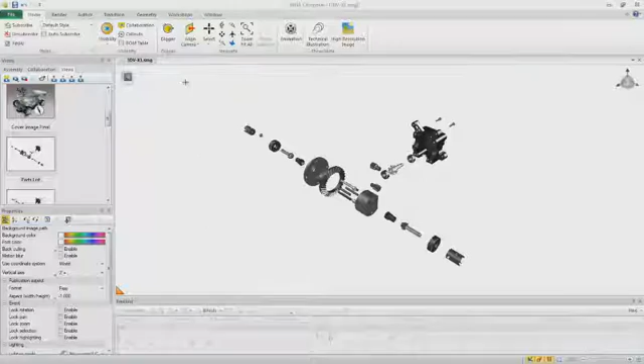This adds two things. It adds a tab to our left pane where we can see the parts that will appear in the BOM, and it adds a new workshop into the task pane. To add the callouts, select all the parts in the viewport and click Create Callouts in the workshop.

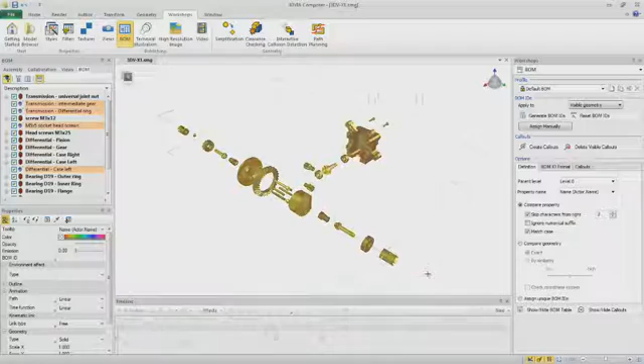By default, they appear at the bottom and the top of the screen. With all the callouts still selected, change the Auto Alignment property to Parametric. Now the callouts all appear close to the parts that they identify.

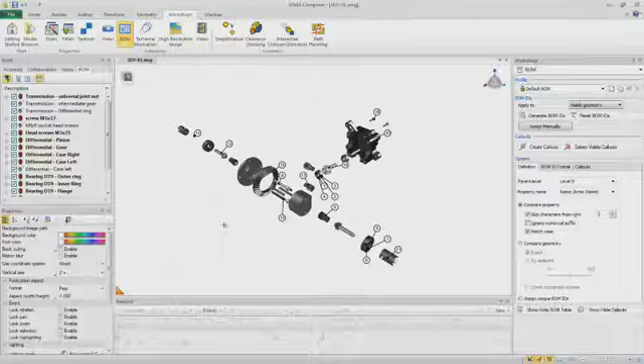To display the BOM, click Show Hide BOM Table in the workshop. Now we see the bill of materials. If your bill of materials appears in a different place or with a different size, you can select the BOM and change the placement properties, change it to free, and then locate the BOM where you want.

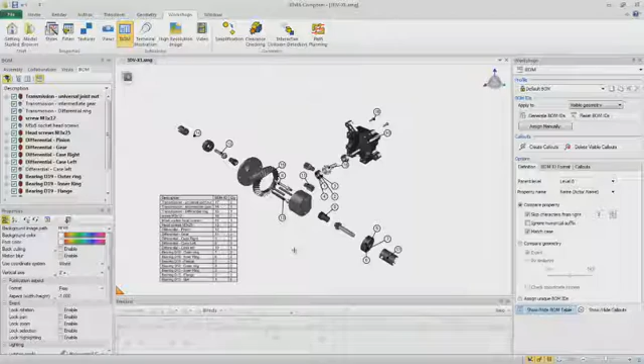Now that we have the view the way that we want, we should update our view. Choose the Parts List view and click Update View. Now let's publish a vector graphics file. On the Workshops tab, choose Technical Illustration. Notice the task pane changes to the Technical Illustration task pane. And now click Save As to publish the file.

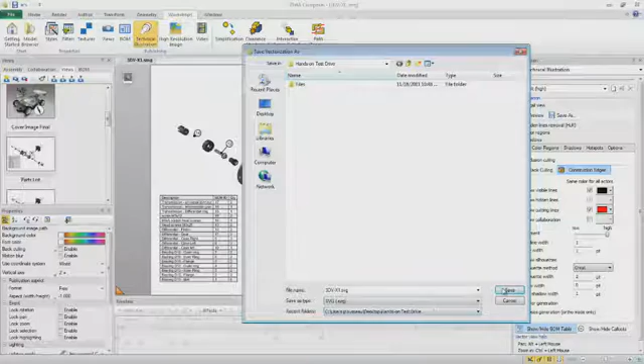For file types, we have various vector graphics file types. We'll choose SVG and click Save. When it's done, here's a preview of what the file would look like inside Internet Explorer. Here is the SVG file in Internet Explorer. We have a vector graphics file.